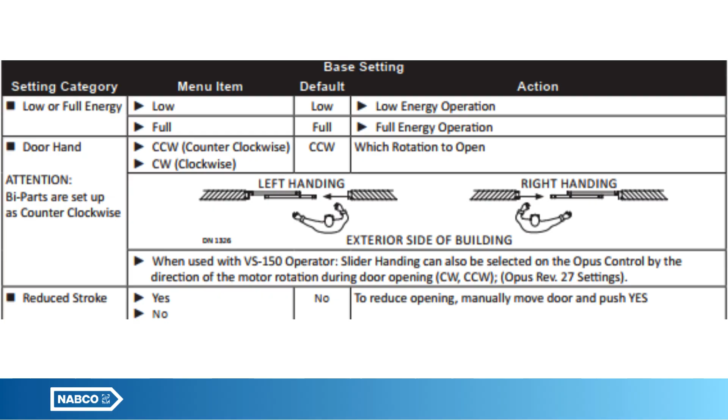Hello, right now we are going to go over basic Opus programming. The Opus control is the name of the control board on all NABCO doors. In the new updated manual, there are boxes next to certain settings. This box indicates that the setting is locked, and the passcode is needed to unlock and make any changes.

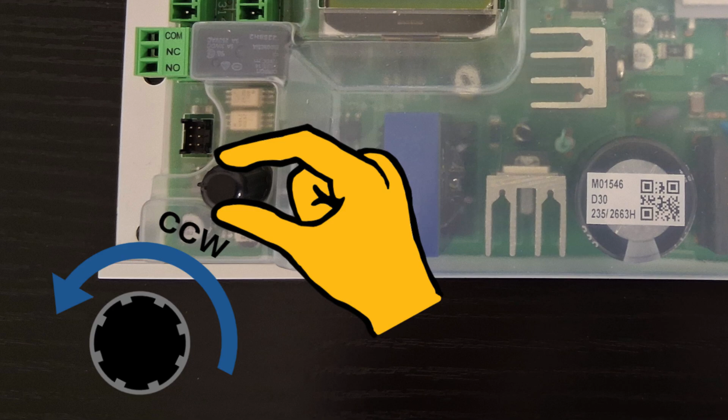This is what the Opus control looks like. It has a digital screen that can display a variety of information, settings, and parameters. Diagonal to the screen, near the green terminal blocks, there is a black dial. This dial will be used to make selections, as well as rotate through different screens or setting options. The dial can be rotated, both clockwise and counterclockwise, and can also be pushed to be used as a button, which is called a brief push, or you can press and hold the dial for 2 seconds, which we will call long push.

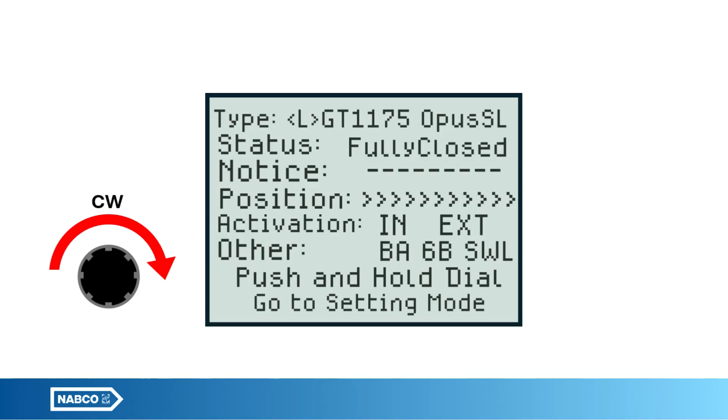Upon startup, this is the main screen, and it gives you information that will help troubleshoot some issues that you may be having with your door. If power is on and the screen is dark, just give the dial a brief push and it will turn on. If you rotate the dial to the right, the next screen will show you the date of manufacture and revision of the control. On revision 32, this will be displayed on all screens before going into the settings categories.

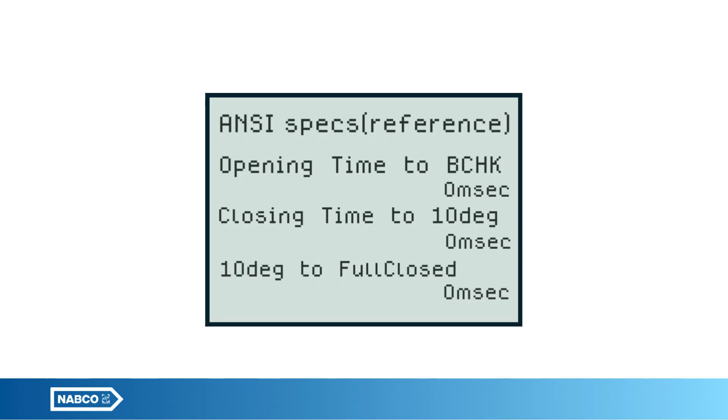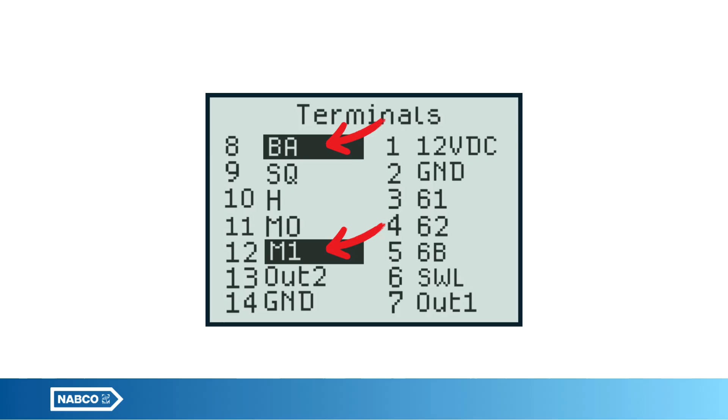If you rotate the dial to the right again, it will display the ANSI spec screen. If you rotate right one more time, it will show you the terminals. The ones that are highlighted show you which terminals are active. This screen is also helpful during troubleshooting as the main screen does not show some of the input and output terminals. If you rotate right one more time, you will return to the main screen.

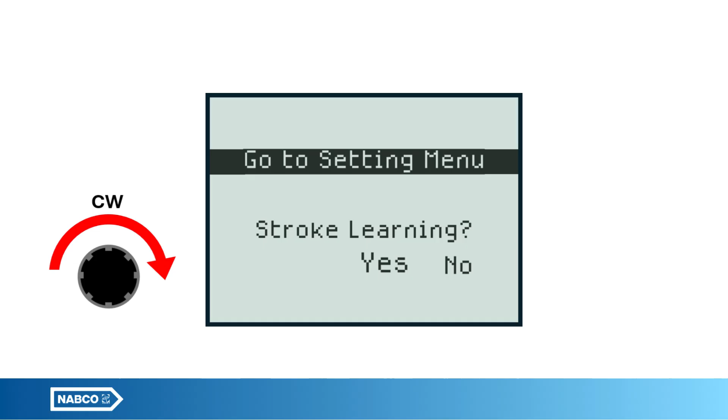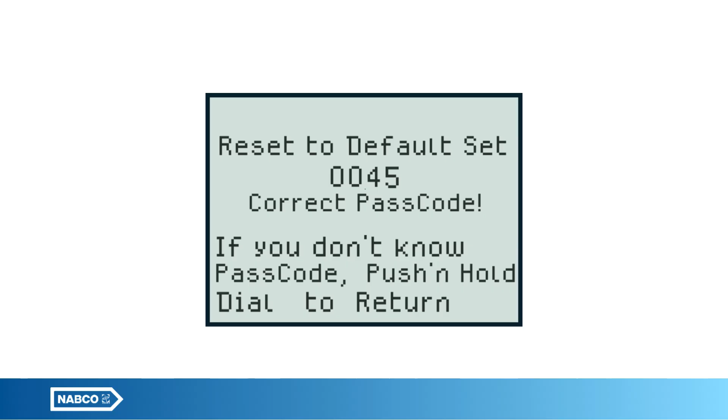Now we will show how to do a factory reset. From the main screen, you will give the dial a long 2-second push. At the next screen, you will see Go to Setting Menu highlighted. Rotate clockwise until it reads Reset to Default Set, and give the dial a brief push. The next screen will prompt you to enter the passcode, 0045. A brief push will select the number and rotating the dial will change it. After you enter this correctly, the Opus will display Correct Passcode. Now give the dial a long 2-second push to return to the main screen. Every setting, except for the base settings, which contain operator type, door hand, etc., are now cleared out and are back to default settings.

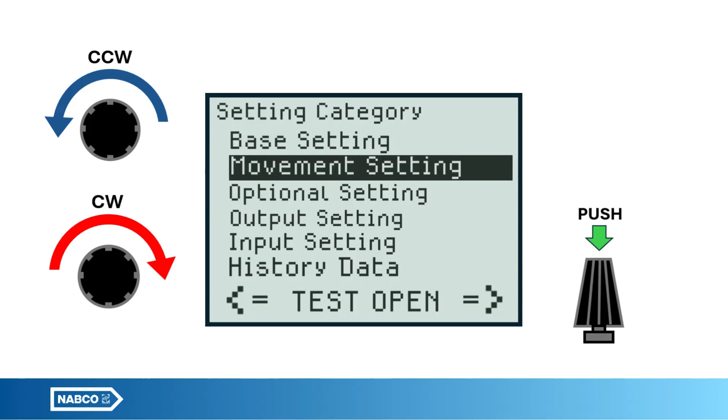Now we are going to go over how to navigate through the settings menu. From the main screen, you will give the black dial a long 2-second push. At the next screen, Go to Setting Menu will be highlighted. Give the dial a brief push. The settings category should now be displayed. Rotate the dial to the desired category and give the dial a brief push. Once in the setting category you have selected, rotate the dial to cycle through the parameters until the desired parameter is found. Then give the dial a brief push.

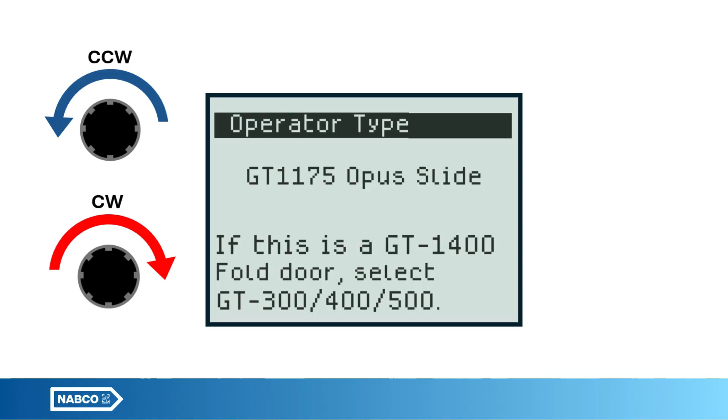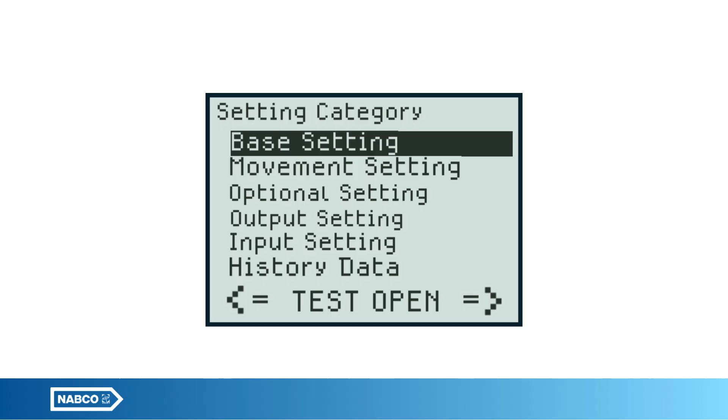The cursor should drop down and begin flashing the previously chosen selection. Rotate the dial to the desired parameter and give the dial a brief push to select it. The cursor should go back up to the parameter. If more settings are to be changed within the selected category, continue rotating through the parameters until all desired changes have been made. Give the dial a long 2-second push to return to the setting category screen. At this point, another category can be selected. Once all parameters have been changed, a long 2-second push from the setting category screen will return the control to the main screen. No changed settings or parameters will be saved,

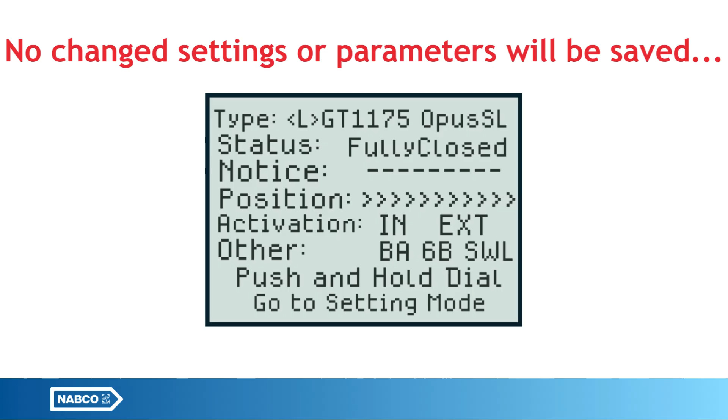unless you return back to the home screen. If the screen times out and goes dark, you will have to rechange the settings, as the settings have been cleared, because the control was not returned to the home screen.